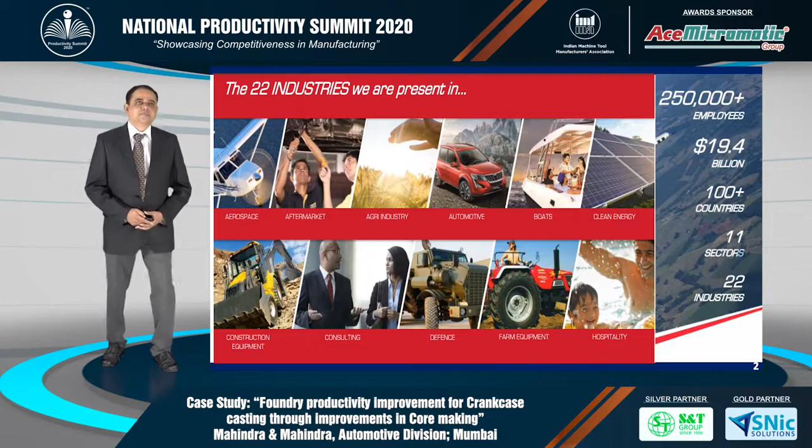A brief about Mahindra & Mahindra Group: it's a $19 billion group employing 250,000 people with presence in 100 plus countries. About Kandivli plant of Mahindra Group: it's the first plant of Mahindra, also called the mother plant, vertically integrated, having vehicle manufacturing facility along with various aggregates including foundry product unit.

Our theme is from the foundry product unit, close to 50 years young foundry, the most senior foundry by age in India. We manufacture complex castings like cylinder head and cylinder blocks. We are the single source for most of the components, exporting to developed countries like USA and to Mitsubishi Engine, Japan.

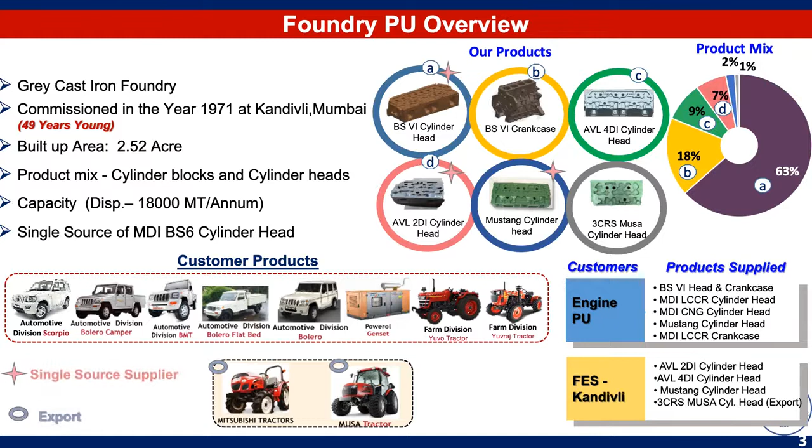Let's understand the salient features of our project. The problem was there were various limitations to meet BS6 crankcase demand during transition. On the challenges front, we challenged a globally available solution which would have cost 20 crores, and instead adopted an innovative and frugal indigenous solution within just 3 crores, delivering all 3 P's - people, planet and profit - which gave us a payback of less than 1 year.

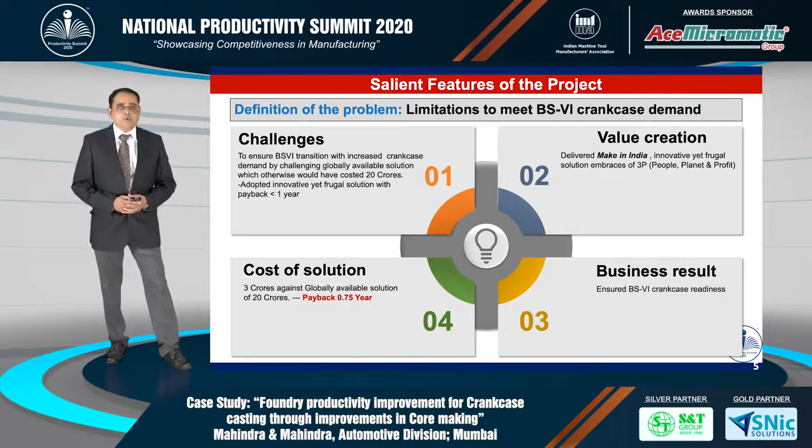So let's understand our project, the power of an indigenous solution, in more detail. This slide depicts the linkage of our project theme with our company's vision and policy deployment towards KMI, KPI and KAI. A SWOT analysis made us realize we need to work on 3 priorities to remain competitive in the market: high natural resource optimization, cost competitiveness, and capacity creation of crankcase castings.

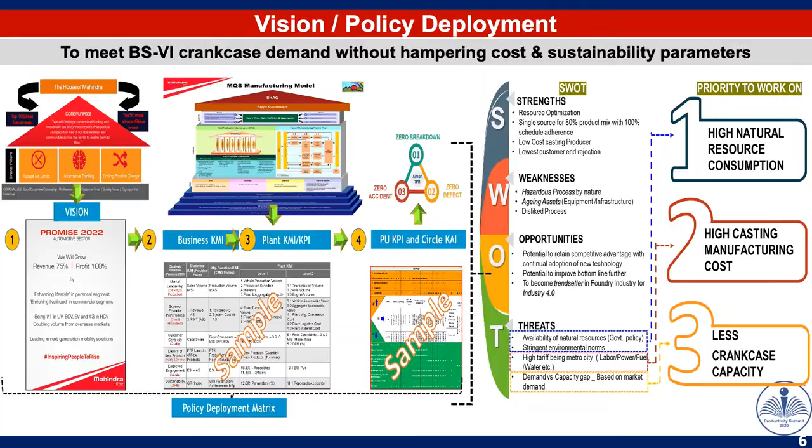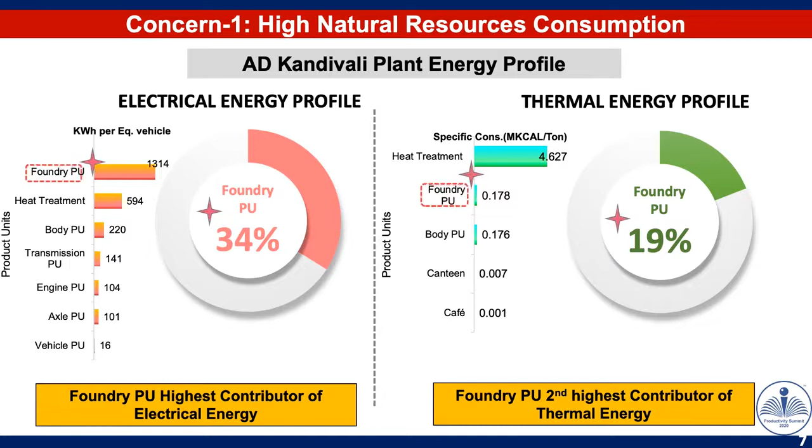Now let's understand the first concern of high natural resource consumption. This is the electrical and thermal energy profile of Kandivli plant. The foundry unit consumes the highest quantity of electric energy among all other units, around 34%, or 1314 units per equivalent vehicle, and is second largest in thermal energy after heat treatment, around 19%.

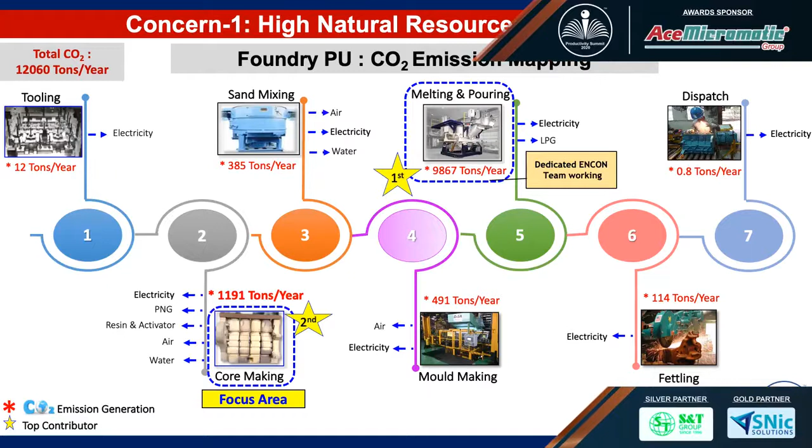That's 0.178 million kilocalories per ton. We converted our electrical and thermal energy into CO2 generation, which is around 12,000 plus tons per year. We did detailed process mapping of our foundry process and understood that CO2 generation in the melting and pouring area is highest due to electrical energy, and in the core room area it is the second highest due to thermal energy. A CFT is already working in the melting area, so we targeted core making as the focus area of our project.

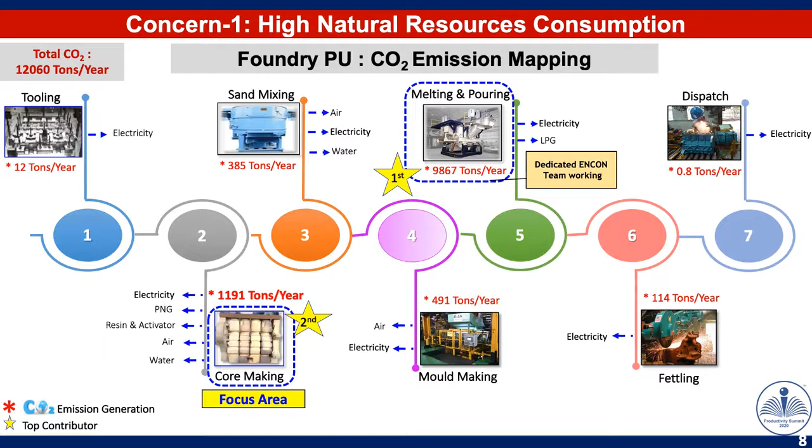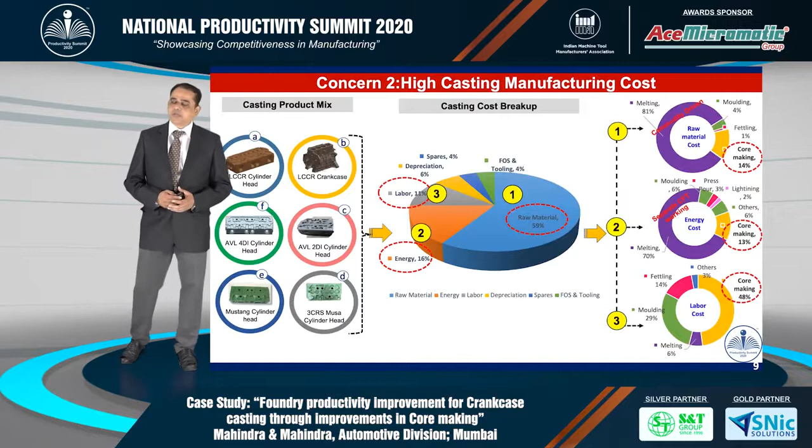Now coming to the second priority area, which is high casting manufacturing cost. We analyzed our cost under different heads and found that raw material, followed by energy and labor costs, are highest among all costs. Hence it needs immediate attention.

Raw material in the melting area is commodity driven, hence we focused on core making areas. Similarly for energy, we found core making to be the second largest after melting, where one CFT is already working on energy optimization. Labor cost also, we saw, is highest in core making area. So we decided the priority based on this pie chart.

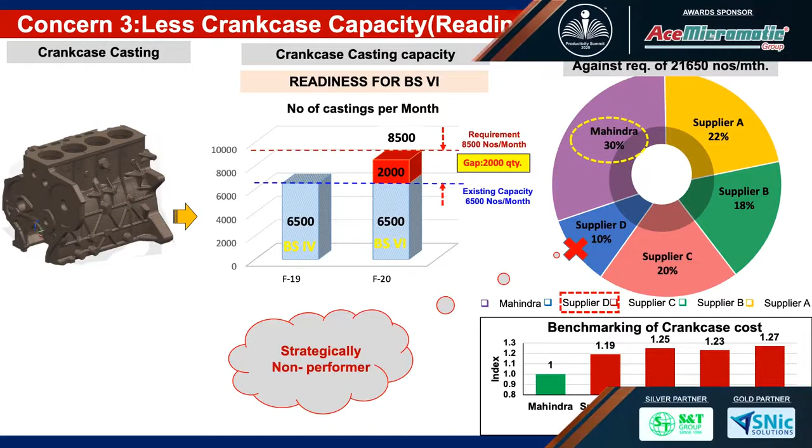Now let's understand the third priority area, which is the capacity limitation of crankcase casting. We can see over here, foundry BS6 crankcase manufacturing capacity was 6,500 numbers per month, catering to 30% of Mahindra and Mahindra's share of business among all other suppliers. There were many other suppliers for this particular crankcase casting. Meanwhile, one of the suppliers got rationalized on account of strategic non-performance, which gave Mahindra and Mahindra Foundry an opportunity to add 2,000 more castings per month.

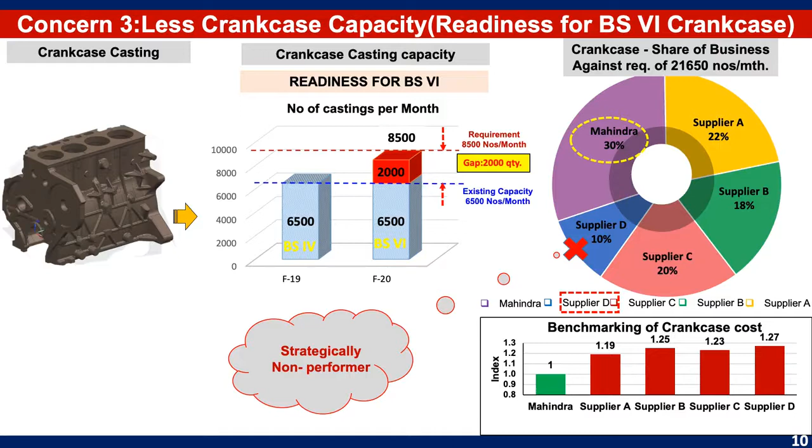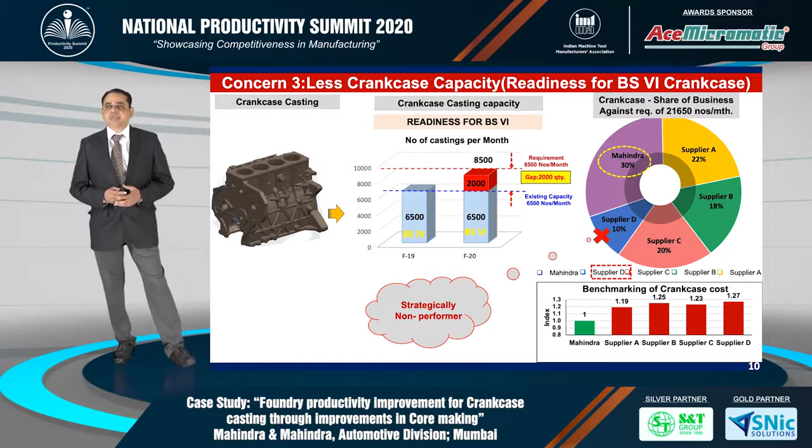At Mahindra, our policy is very fair and transparent. The most competitive vendor will get good business irrespective of whether he is M&M or non-M&M. So it is imperative for us to remain cost competitive at all times; we have to be on top always. Cost of M&M produced casting is lower compared to other suppliers, which can be seen here through index value. If I consider the index value of Mahindra as 1, then other suppliers' cost is higher, by around 19% to 27%.

We did Yamazumi analysis, process mapping, and identified the capacity bottleneck is in the core making area, where the gap is around 2,000 numbers per month.

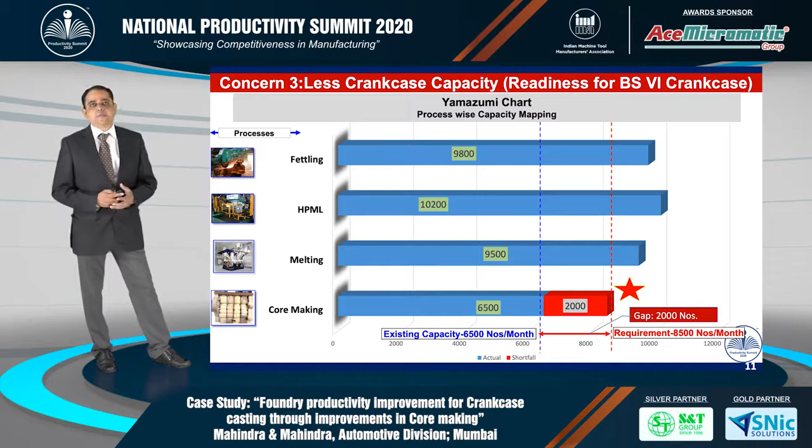Now let's understand what core is. Cores are made up from high abrasive silica sand for the casting manufacturing process to form internal profiles and cavities inside the casting. The existing process is a combination of shell and cold box process.

The shell process is an endothermic process, hence needs heat which is around 300 degrees centigrade. There are 7 types of different cores required to produce one crankcase casting, and all these cores are made up of sand with necessary binders and additives, and they are non-reusable. Once we produce the casting, the cores convert into dead sand.

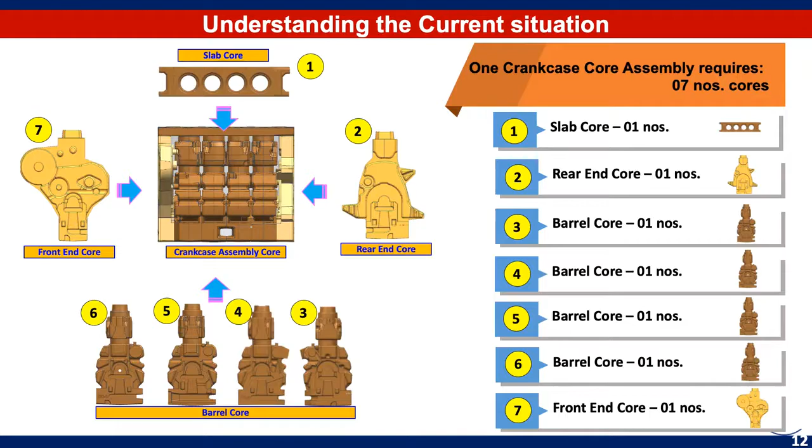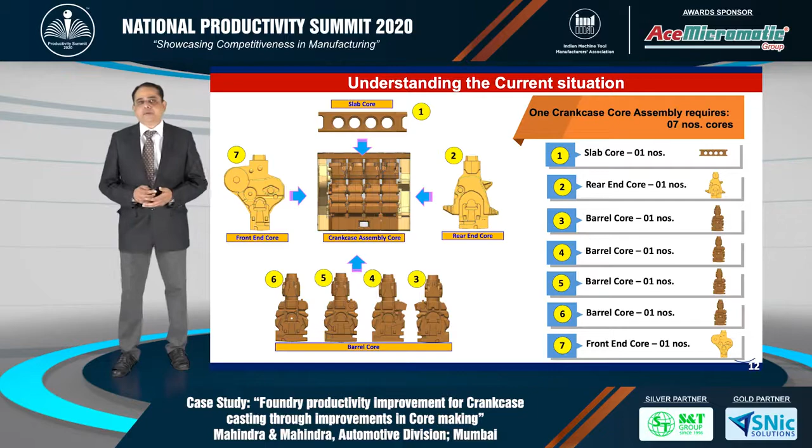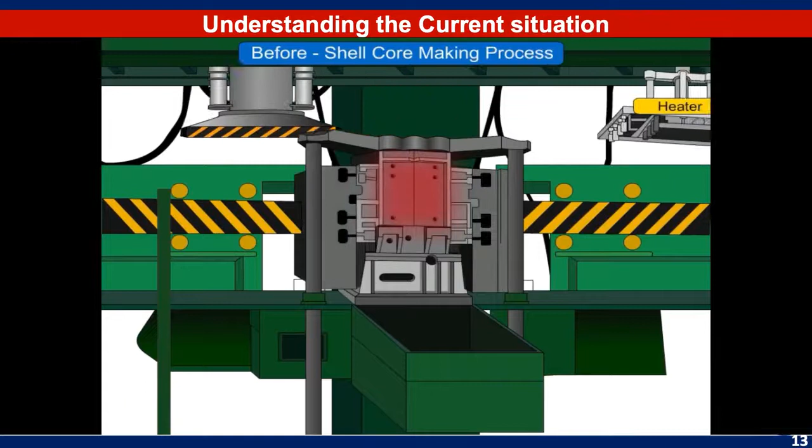These 7 types of cores are produced on 4 different machines, as we can see over here. Cores are assembled to produce every single crankcase casting. Production capacity with all machines put together was 260 numbers per day with 18 people manufacturing them. You can see one example of how one machine produces only 2 cores with the shell process. Similarly, there are 4 different machines producing 7 types of different cores.

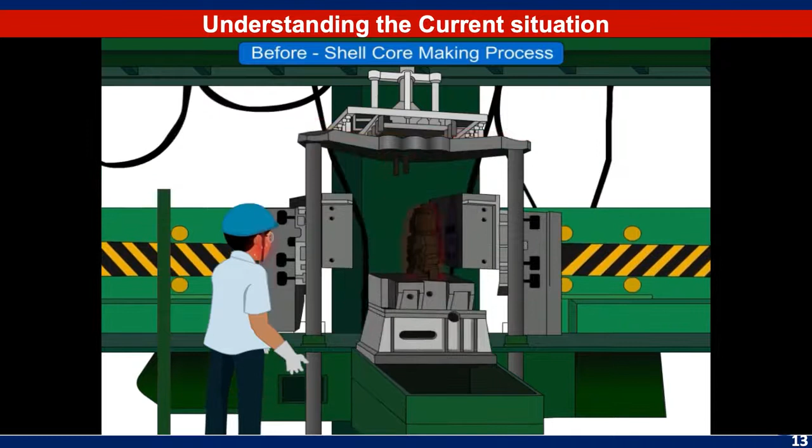We did Why-Why analysis against all 3 priorities and found that the process is the root cause. So we decided to challenge the process itself. The idea triggered to explore a green manufacturing process.

We did a benchmarking study to understand the non-exothermic process at various best foundries in India as well as abroad. There was an option readily available, used globally across industries. However, we found that the capex of that available option is very high, close to 20 crores, with a payback period of more than 5 years.

We also validated it through life cycle cost, which includes capex, revenue, as well as discounting factor. The number of machines required were also 2, with a robotic cell having total space required around 2,000 square feet. This was not what we were intending to do. Our aspiration was to develop a fully indigenized and frugal concept meeting all the requirements to remain competitive.

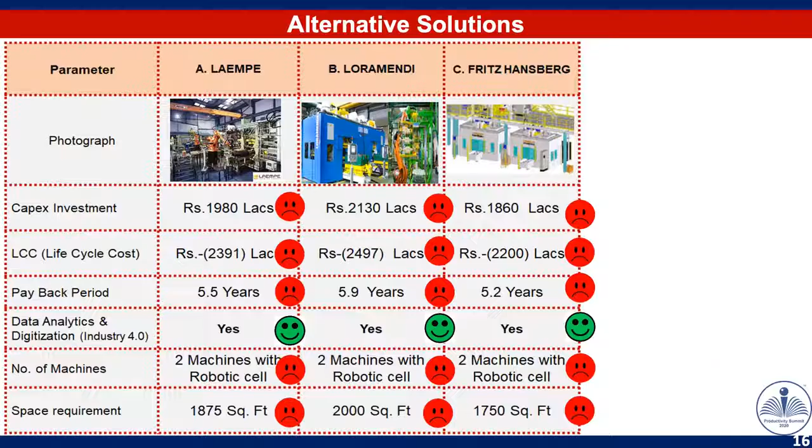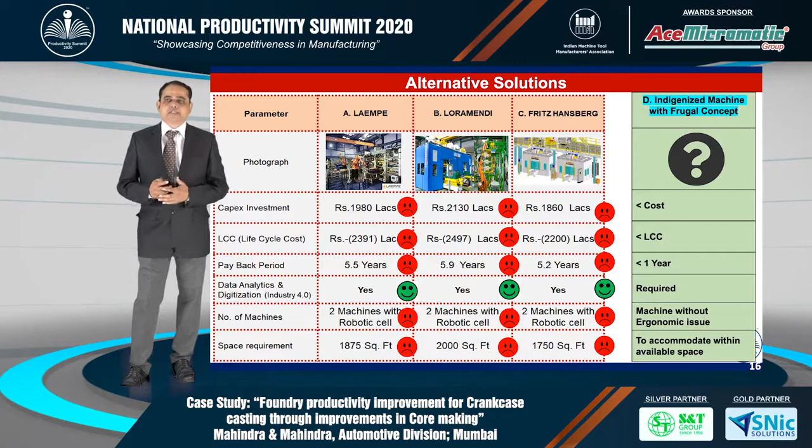What next? There was no option. So we decided to develop an indigenized machine with a frugal concept that should be at lesser cost, should have a payback of less than 1 year, which should give all the global solutions on our machine, and which should accommodate in lesser space. That was the challenge we took at our end.

To realize our aspiration, we had 4 further challenges: layout space constraint, sand capacity limitations, manual core unloading, and we wanted to integrate Industry 4.0, in line with the global solution, that is visualization and data analytics.

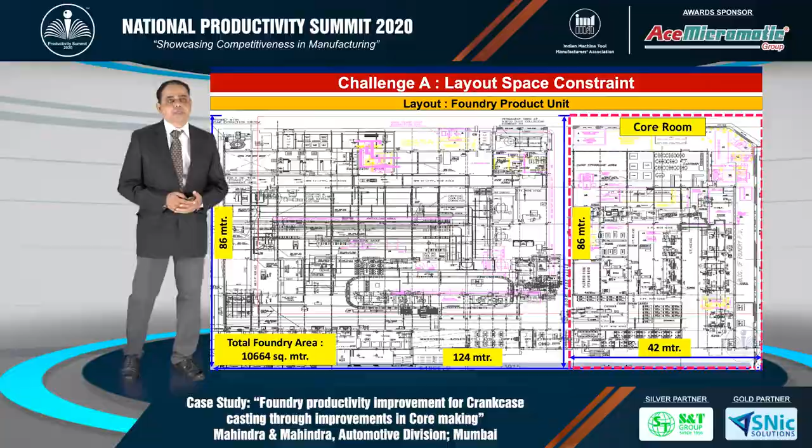Let's understand our space constraint challenge first. This is our total foundry layout. The installed capacity of our foundry was 6,000 tons per year when it was commissioned in 1972, which has gradually increased to 18,000 tons per year over time with various improvements. This statistic shows our M&M foundry has the best space utilization per ton among all Indian foundries, and second best considering global foundries abroad.

The foundries abroad have a high degree of automation as well as vertical layouts. They can afford it because they get a premium price from their customers, which we cannot afford.

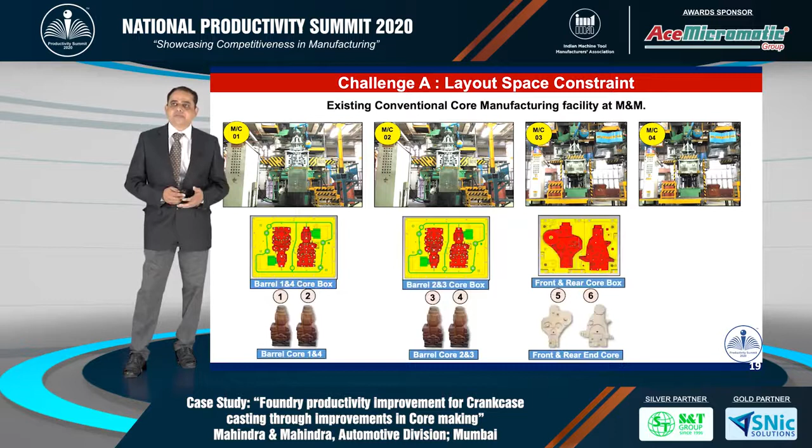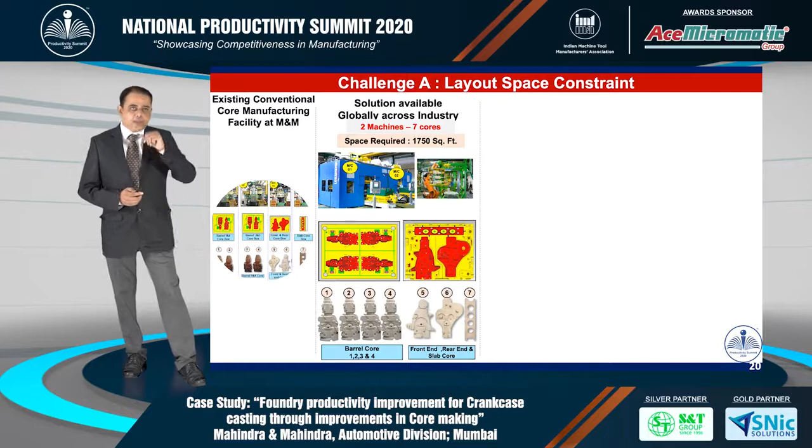I am reiterating our existing core manufacturing facility with 4 machines for our BS4 crankcase, and the global solution available across industries, which has high capex with space required of 1,750 square feet and a minimum of 2 machines. So our challenge was limited space as well as high capex.

So we decided to go with an indigenized single machine producing all 7 cores which can fit on our layout. So our challenge in front of us was: there's no space, how to accommodate a single machine within the given layout. You can see over here how compact our layout is.

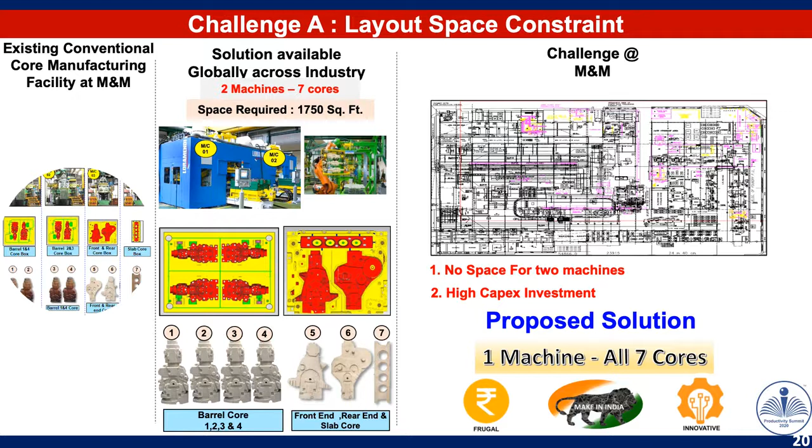So this frugal solution we wanted to develop, but the biggest size machine available in India was producing a maximum of 4 numbers of barrel cores together, and the balance 2 end cores and slab cores required another machine. The first idea click was to get the slab core split into 4 parts and merge with the barrel core, by which we got rid of 1 slab core.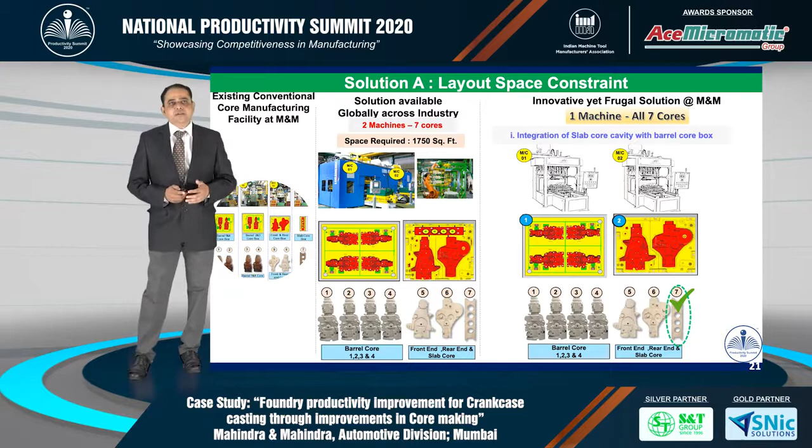Still, the front and rear cores were requiring a second machine, as we can see over here.

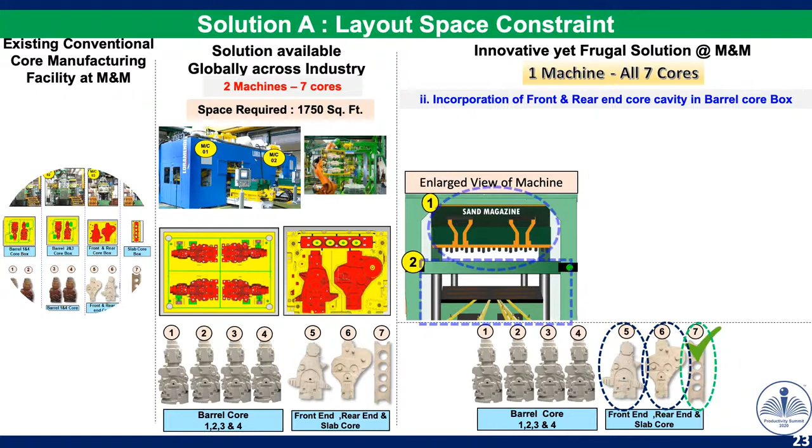We tried to fit 2 end cores also in the same core box. However, there was no space to accommodate 2 end cores. So what to do next? We challenged the dimension of the machine and decided to work towards the core box and sand magazine. We studied the sand magazine flow analysis with respect to core box and accordingly modified our sand magazine in line with the core box, along with modification on the amine gassing hood.

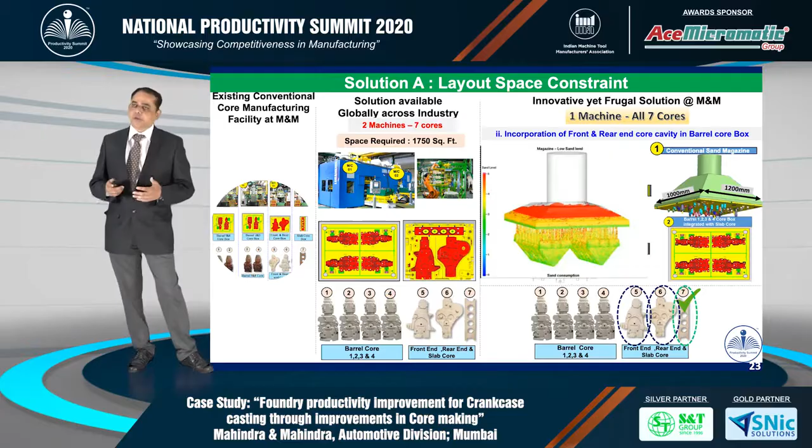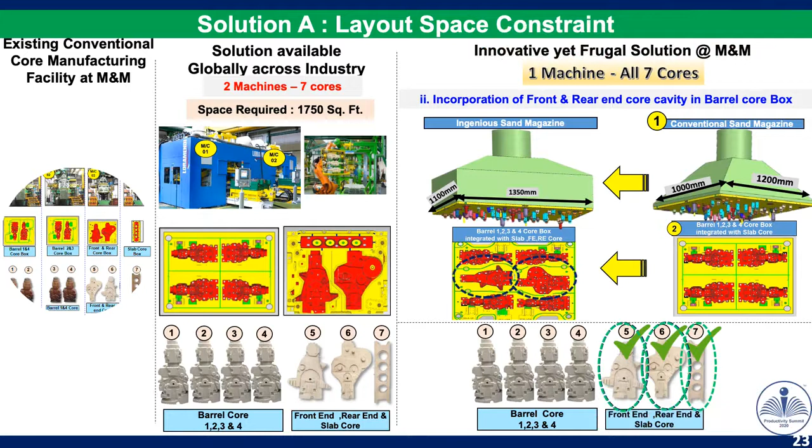We also explored challenging other parts of the machine and made necessary modifications accordingly. With this, we could accommodate 2 end cores in a single core box. Now you can see here all 4 core boxes can produce on a single machine.

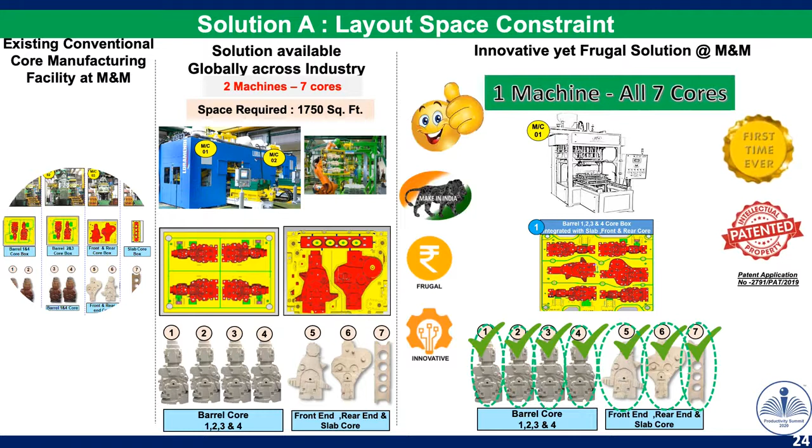It is a patented design with an innovative and frugal indigenized approach, realizing the Make in India aspiration, vocal for local. I can proudly say this is the first machine which can produce all 7 cores together in a single cycle.

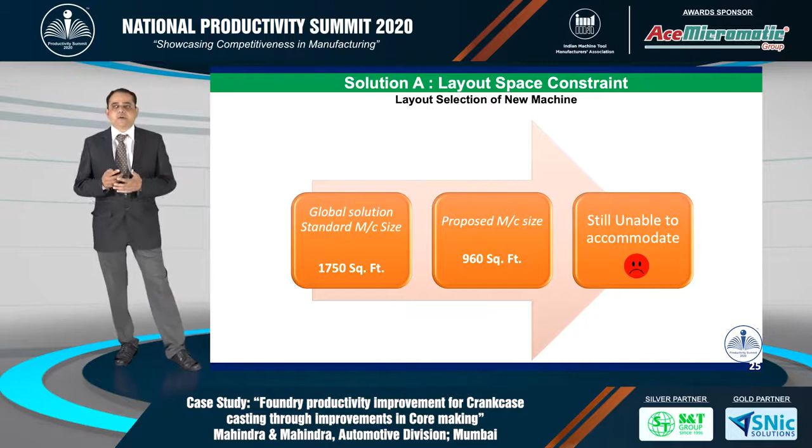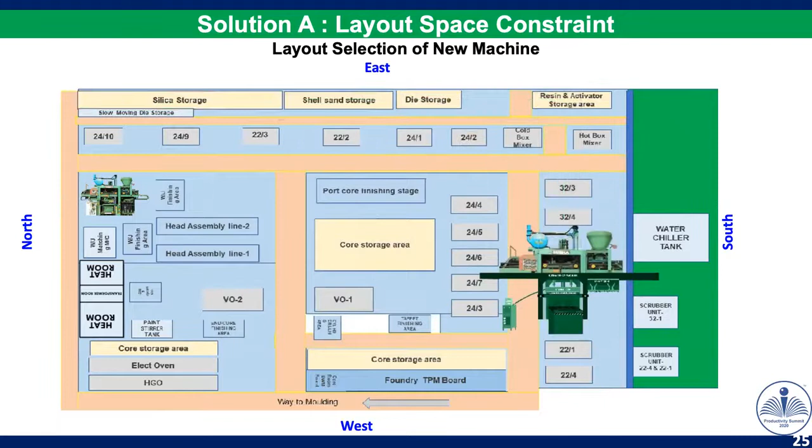But that was not the end. Though our new machine's floor space was optimized to 960 square feet compared to the global machine's around 1750 square feet, we still had a challenge on how to accommodate even 960 square feet in our existing plot where we had no space at all. As you can see here, we tried to place the machine towards the south by rearranging machines, but it was blocking the entire aisle as well as fouling with the existing factory roof, which is almost a 3.5 story building. Input raw material supply was also far away from the machine. So that option was ruled out.

So what to do next? The next option was to locate it at the north side. Again, we tried to relocate some machines and reorganize the various work stages. Still, it was not getting accommodated - we had many challenges. You can see here we reorganized the stages, optimized the stages, but still had an issue that the machine was unable to fit because it was still fouling with the roof as well as blocking the aisle.

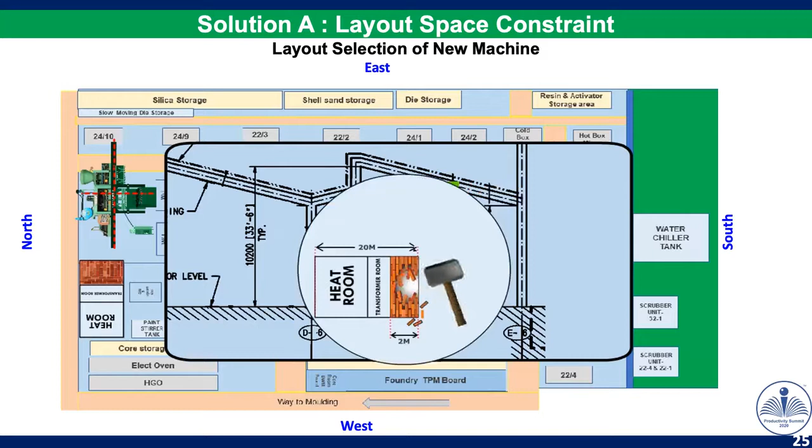We did overcome that constraint by optimizing the heat room size, shifting the machine towards the available space, and also taking the machine below ground level by about 1 meter, accommodating it perfectly as per the specified requirement. Thereby we got rid of the layout space constraint.

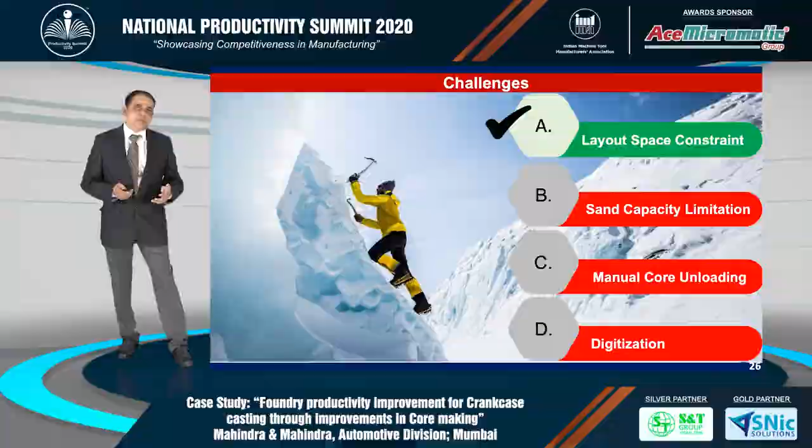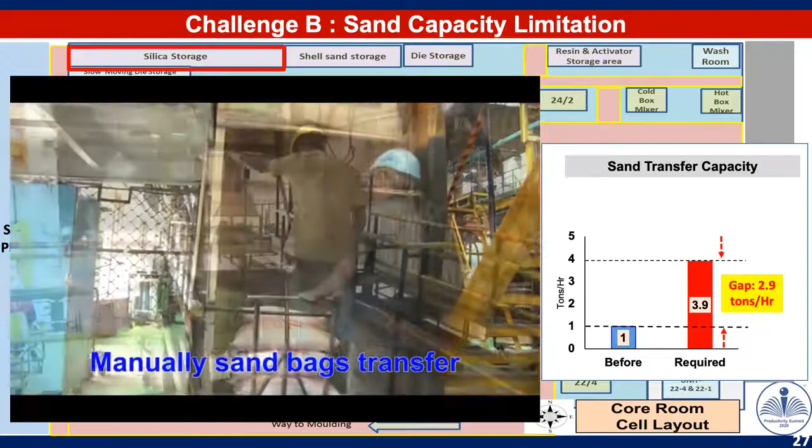So our next challenge was sand capacity limitation. We can see here our existing process of tedious manual silica sand transfer, mixing with various additives, and discharging it into the respective machine hopper. The capacity was only 1 ton against the requirement of 3.9 ton. The gap was 2.9 ton per hour.

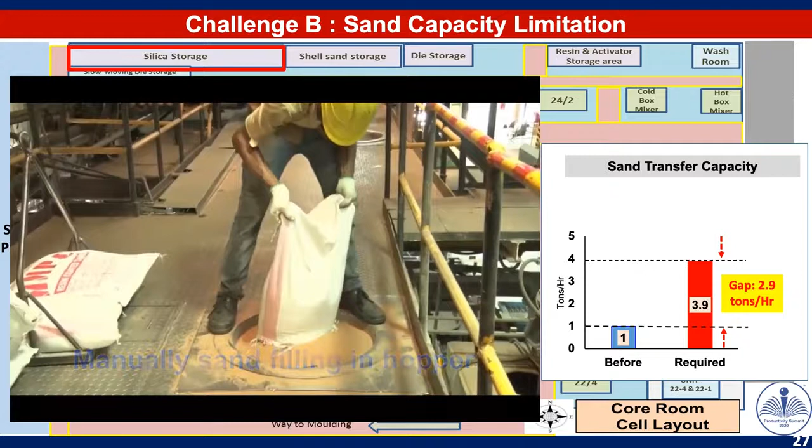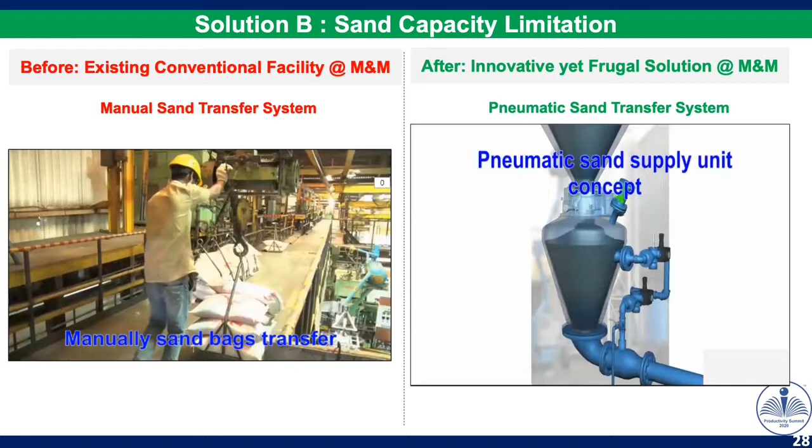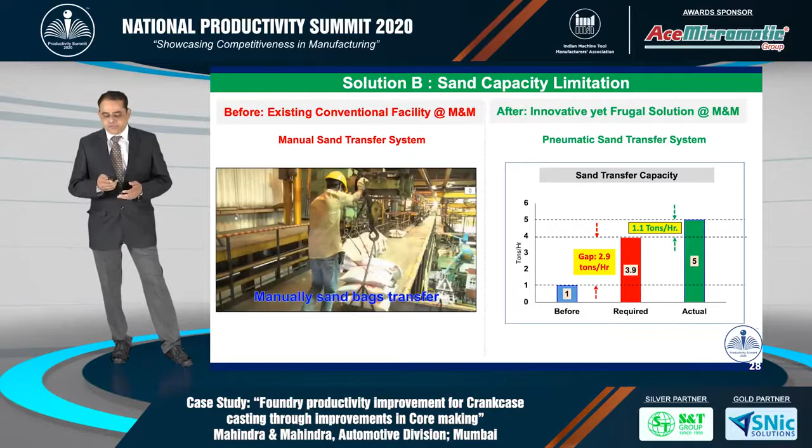We challenged that by introducing a fully automated pneumatic sand supply unit concept. You can see in this animation all necessary additives being mixed automatically and discharged to the machine. It has been transferred to the respective machine and is discharging to the machine without manual intervention. By this, we got rid of this constraint and created a capacity of 5 ton per hour, again against the requirement of 3.9 ton per hour. Thereby we got rid of the sand capacity limitation also.

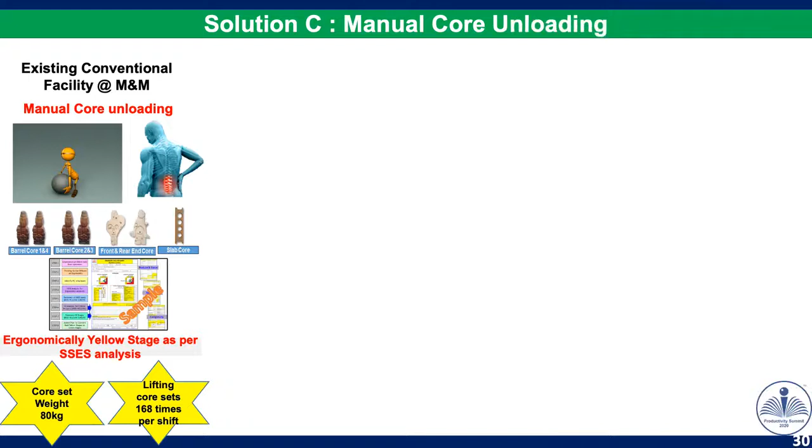Now let's understand our third challenge of manual core unloading. This calls for high fatigue to the operator. You can see here that the operator needs to lift the core of 80 kg, 168 times in a shift. So it was a very high-fatigue operation, and ergonomically we analyzed and found it to be a yellow stage under SSES - simplified safety ergonomic sheet analysis - which we follow as a methodology for identifying ergonomically yellow as well as red stages.

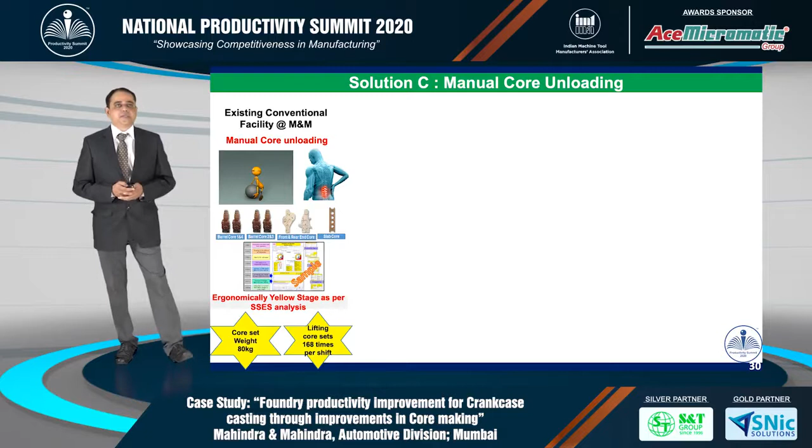The solution available globally is to use a robot for core takeout from the machine, which would have otherwise cost unnecessarily 120 lakhs. We opted for an indigenized frugal solution of a flexible core unloader, which cost us only 40,000 against the globally available option of 120 lakhs. It is fulfilling our purpose of taking the core out from the machine.

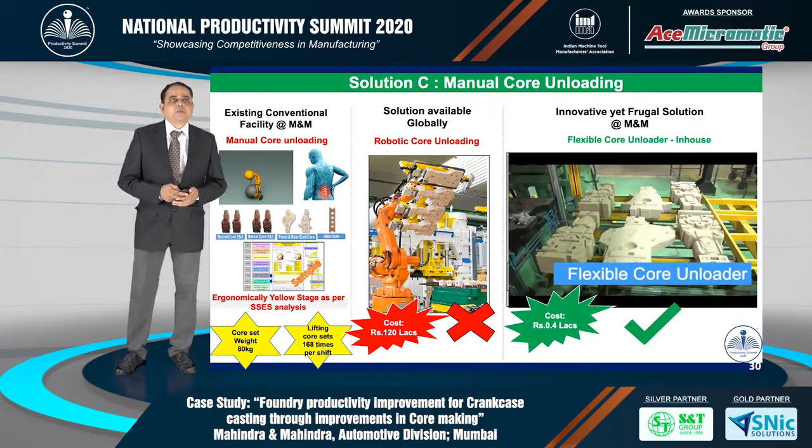Our next challenge was how to incorporate data analytics and digitalization on the indigenized machine. The fourth challenge was how we will incorporate Industry 4.0, especially data analytics and digitalization like a global solution. We Indians are not behind.

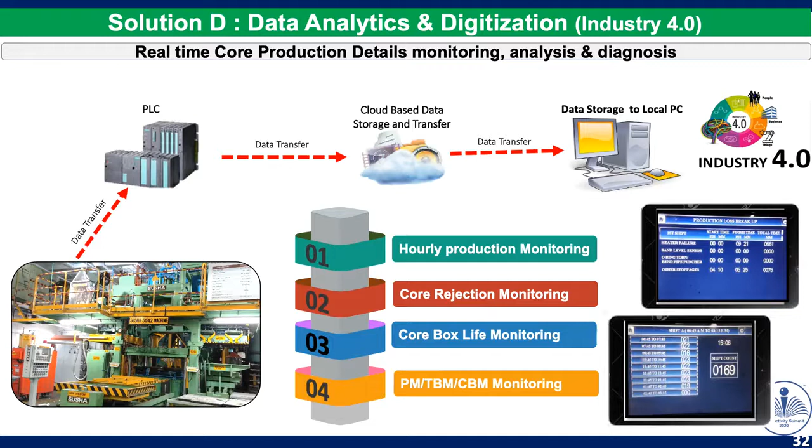Our Mahindra team, along with the equipment manufacturer, incorporated all production related and quality related parameters, core box monitoring, as well as PM, TBM, CBM monitoring, which we monitor under TPM since our foundry is TPM consistency stage certified by JIPM, Japanese Institute of Plant Maintenance. Thereby we got rid of all the challenges.

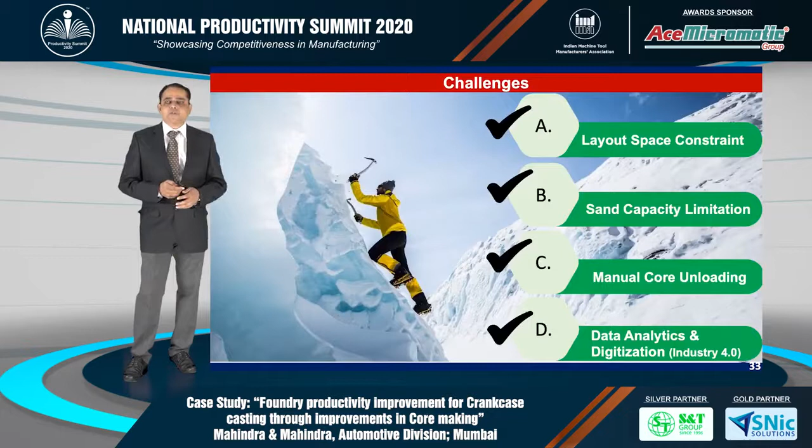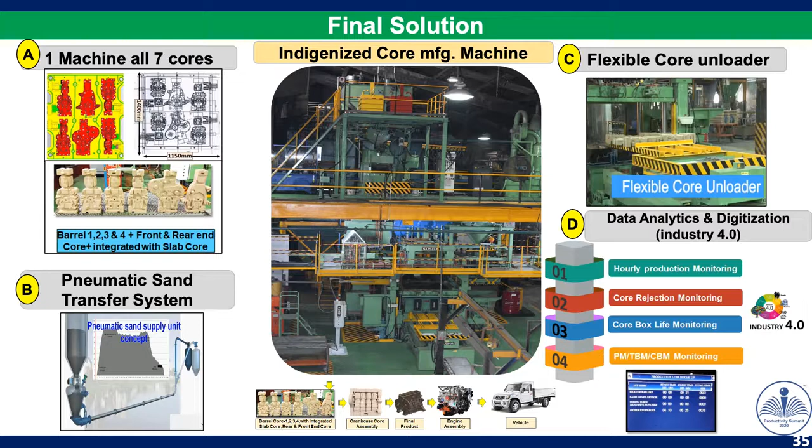You can see the height of the machine, almost touching our roof, 10 meters high, close to 3.5 stories, producing all 7 cores in a single die. It has entire automation for the sand transfer system, a flexible core unloader with a frugal approach, and entire Industry 4.0 parameters of data analytics and digitalization incorporated in our machine.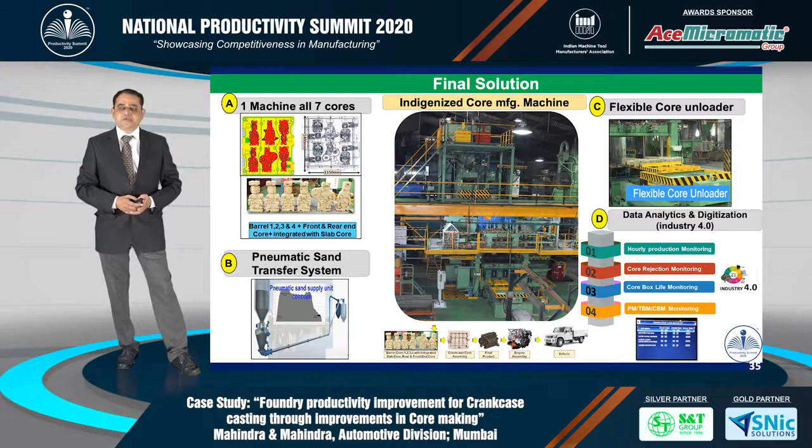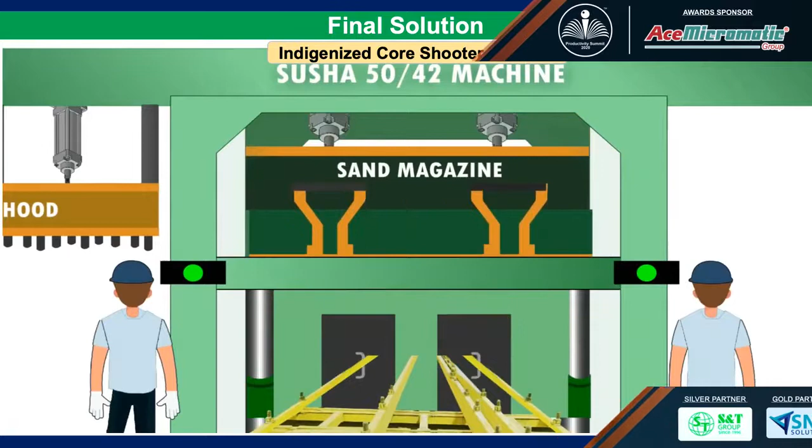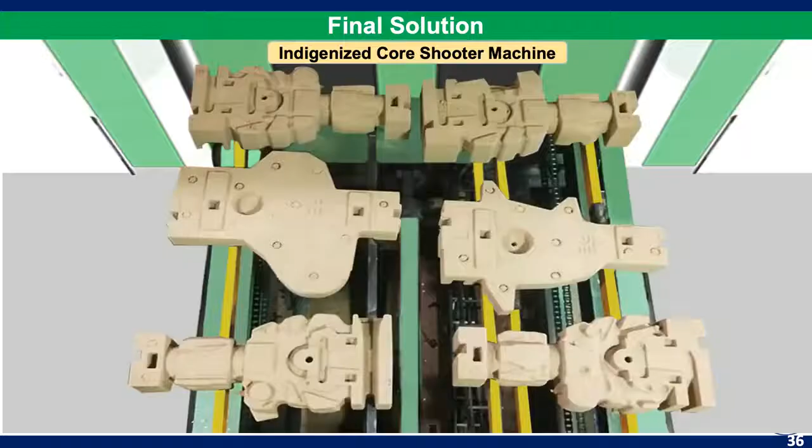You can see an operation of this machine producing 7 cores in a single cycle through an animation. The gassing hood requires no heating - in ambient conditions we can produce all 7 cores. Cores are taken out with a simple mechanism using the flexible core unloader.

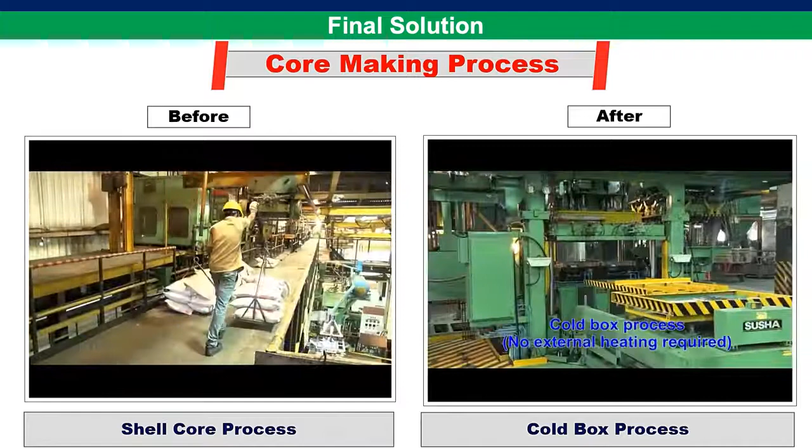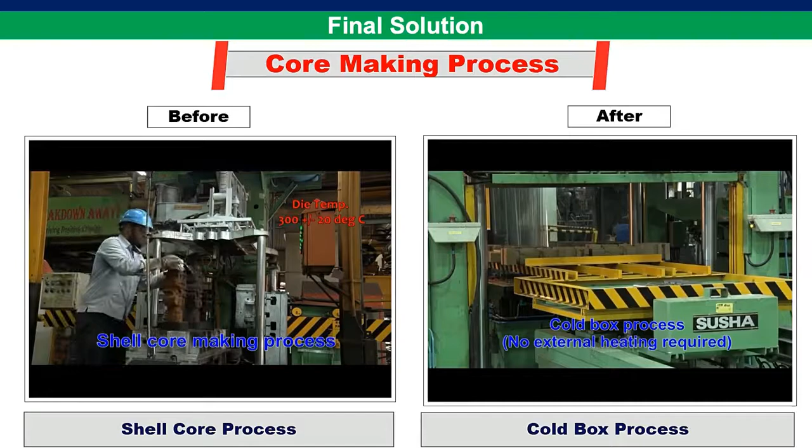We can look at the before and after process for better understanding. Earlier, one core shooter produced 2 cores with an exothermic process, requiring heating and a lot of fatigue, with manual sand transfer. You can see the operator taking out the core manually - 2 cores per machine required more machines. However, in the after case, 1 machine is producing all 7 cores easily.

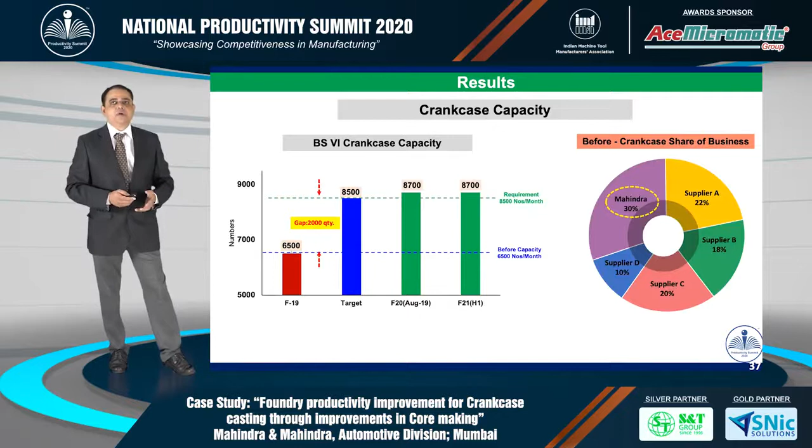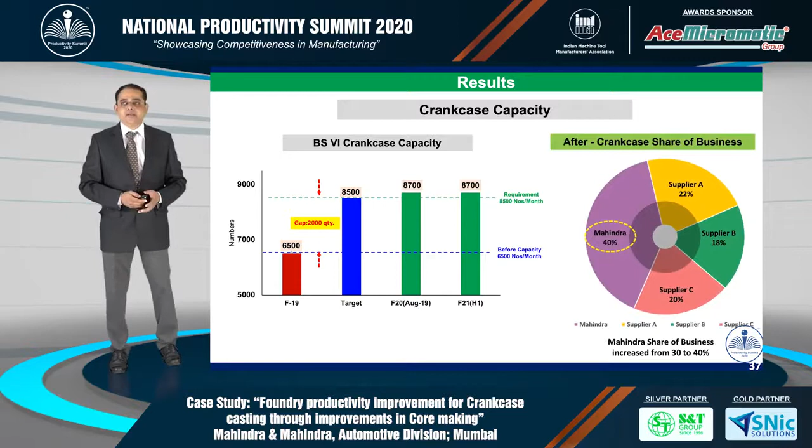Results: capacity of crankcase production increased to 8,700 numbers from earlier 6,500 numbers. We created 2,200 more crankcases than the requirement of 2,000 numbers. Share of business for Mahindra & Mahindra increased from earlier 30% to now 40%, with seamless migration from BS4 to BS6.

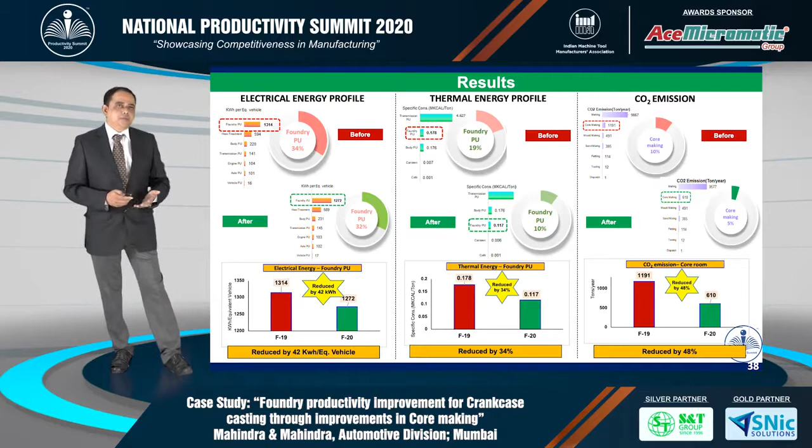Results under production, quality, cost, safety parameters: production increased by 34%, manpower reduced by 50%, and productivity improved by 169%. Quality improvement achieved was 25%. Cost of product reduced by 7%, making us more competitive in the market. And no ergonomic stage on this machine.

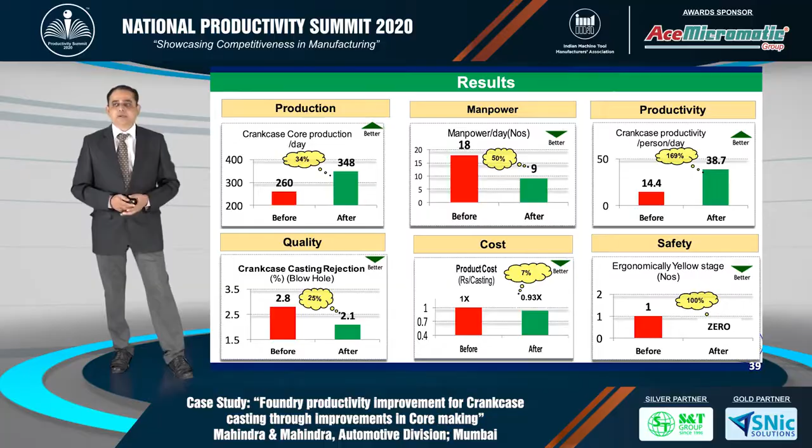The benefits: machine OEE of this indigenous machine is 86%. Cost of poor quality has been reduced by 5.8 lakhs. Total YOY cost saving achieved is 362 lakhs per annum, which we have certified with our accounts department.

Under the environmental front, CO2 emission reduced by 581 tons per year, which is equivalent to electrifying 1,000 homes per year and heating the gas for 1,200 homes per year.

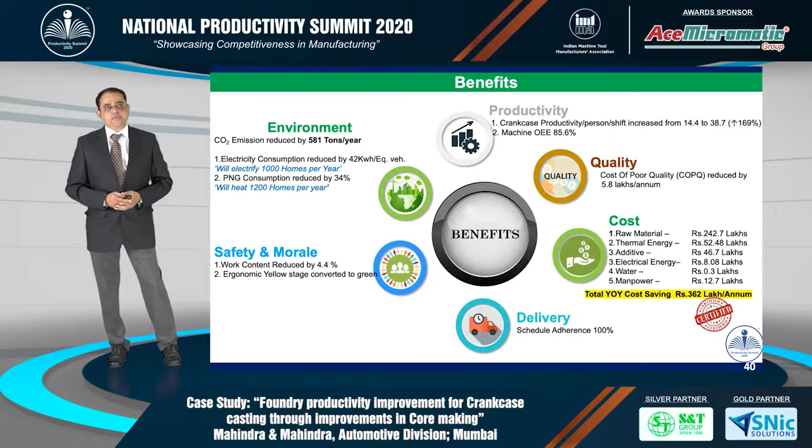We have ensured standardization to retain and sustain the benefits, and we have shared horizontal deployment with our own Mahindra Group foundries as well as other foundries.

We have received an award for best energy efficient project at sector level and best sustainability project at plant level. Proudly, I can say the Indian Institute of Foundrymen has awarded us best foundry in India, as well as best green foundry in India at national level, and best quality performance in India at national level too.

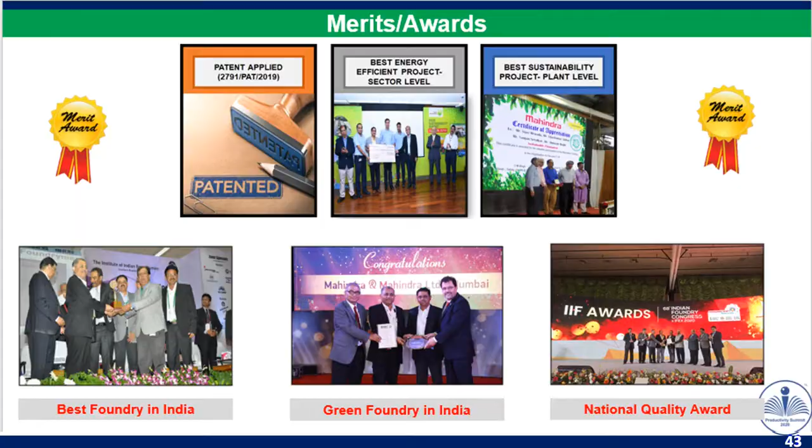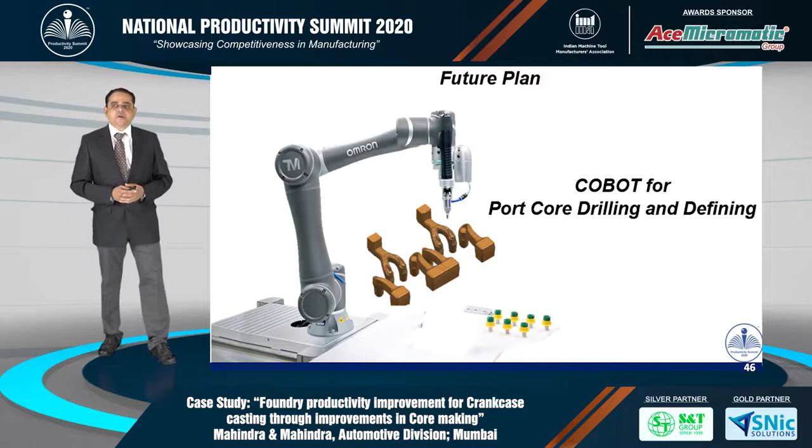Our future plan is to work on port core drilling and defining areas. Port cores are most critical in terms of fuel efficiency of the vehicle as well as performance of the engine. We'll be working to improve our port core manufacturing process further with the help of a cobot.

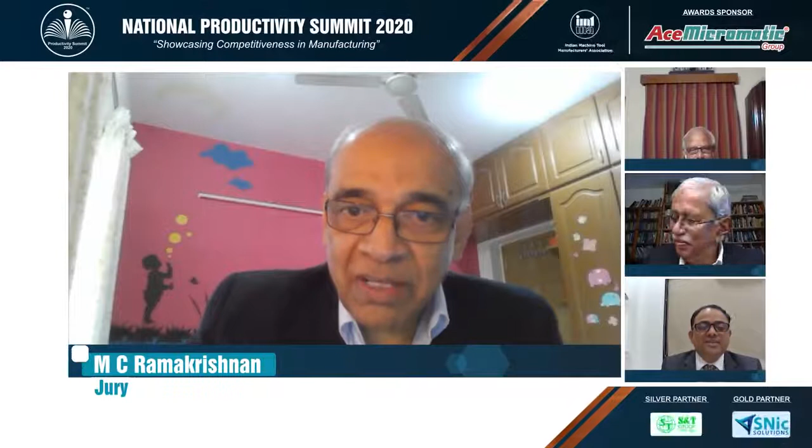I have two questions. First, is this a complete unique project of this type? When benchmarked with other companies, is this a totally unique solution? Second, you mentioned your cost for the transportation part as 0.4 lakhs, while the other robotic solution was 120 lakhs. Of course, when you compare with the best in class at 120, that has its own plus and minus, we'll ignore that. But there could have been other companies which might have used a non-robotic solution. Have you attempted any benchmarking in cost with respect to that? These were the two questions.

Okay sir, first question about this project being unique - I would say this project is like a benchmark kind of process. It is currently being used in all developed global foundries and a few foundries even in India, but at a cost of around 20 crores, as I explained in the project, because this is the readily available solution from three renowned OEM manufacturers like Loramendi, Hottinger, and Laempe. They give us the solution, and it has been readily adopted and put into use by foundries. Our uniqueness is that we challenged that capex, and we developed all those features we wanted to solve in that project, without compromising on quality or other deliverables, and got it manufactured from a local manufacturer by adopting features from those global offerings.